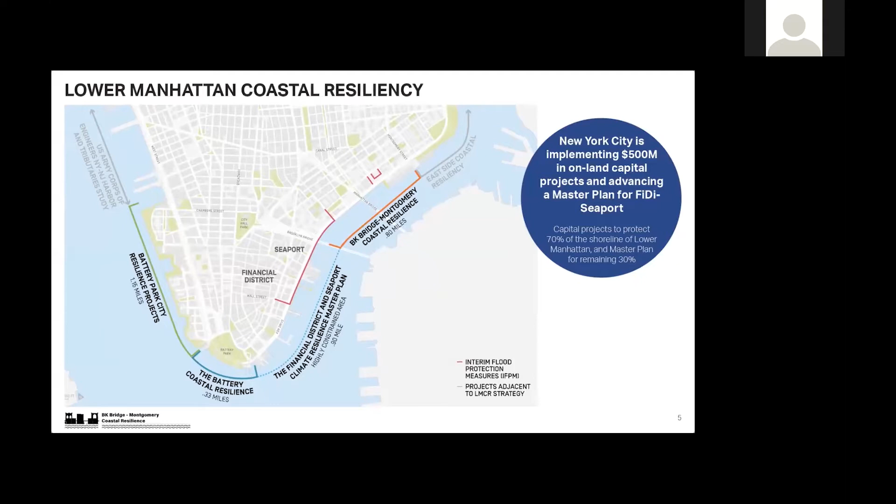And finally, the focus of this presentation, the Brooklyn Bridge-Montgomery Coastal Resilience Project, or BMCR for short. BMCR will reduce flood risk in the 2 Bridges neighborhood while maintaining the community's views and access to the waterfront.

In 2 Bridges, flooding from Hurricane Sandy damaged buildings and infrastructure, disrupted mobility and access, and demonstrated the neighborhood's vulnerability to climate change.

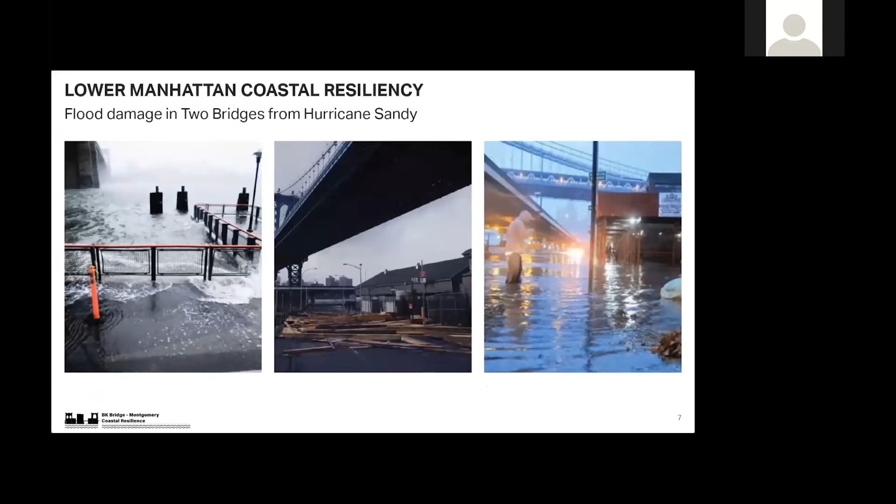In the future, impacts from coastal storms will be even more severe. This map shows the potential flooding that could result from a 100-year storm surge in the 2050s. A 100-year storm has a 1% chance of occurring every year. Flooding may extend up to 3 blocks inland, and most of the buildings within the floodplain are residential. People and homes will be at risk.

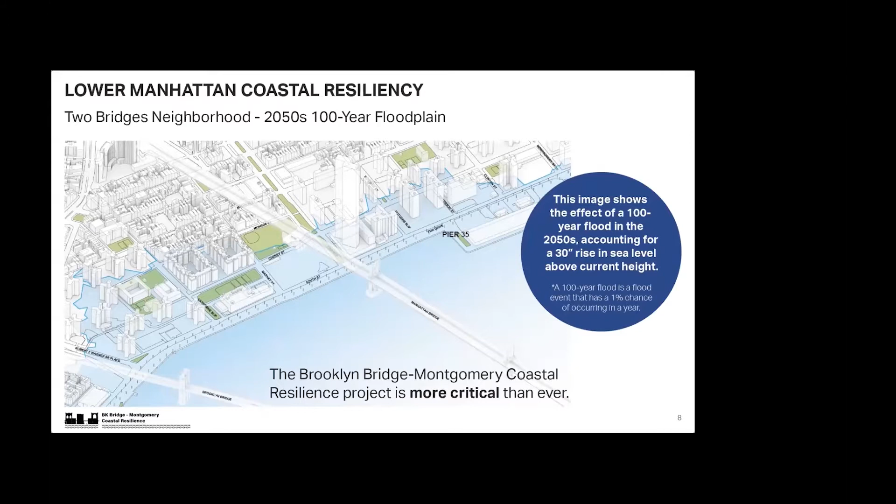For more than 4 years, the BMCR project team has been meeting with the community to get input and feedback on the design. In addition to top priorities of reducing flood risk and preserving views and access, we heard how this community uses the waterfront today and what types of amenities should be kept or added to the waterfront.

This presentation will show how community feedback was incorporated into the design. For example, we heard the desire for flexible use spaces, universal fitness equipment, playgrounds and gliders, and have worked to incorporate these features into the design.

We've come a long way since 2016, and the design is now more than 75% complete. That means the design components are set, including the flood protection system and public amenities.

Through the final design process, we'll be adding details for construction. Final design is scheduled to complete next summer, 2021, and construction will start at the end of 2021. We will hold one more public meeting in the spring to share next steps.

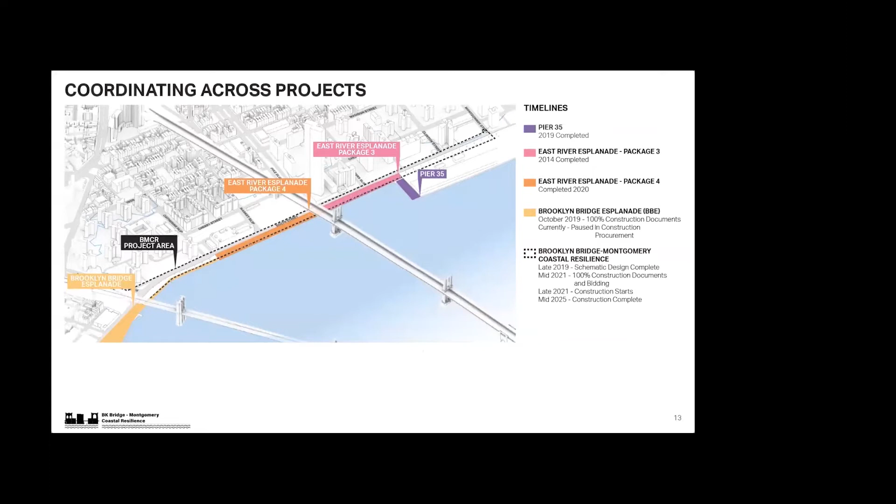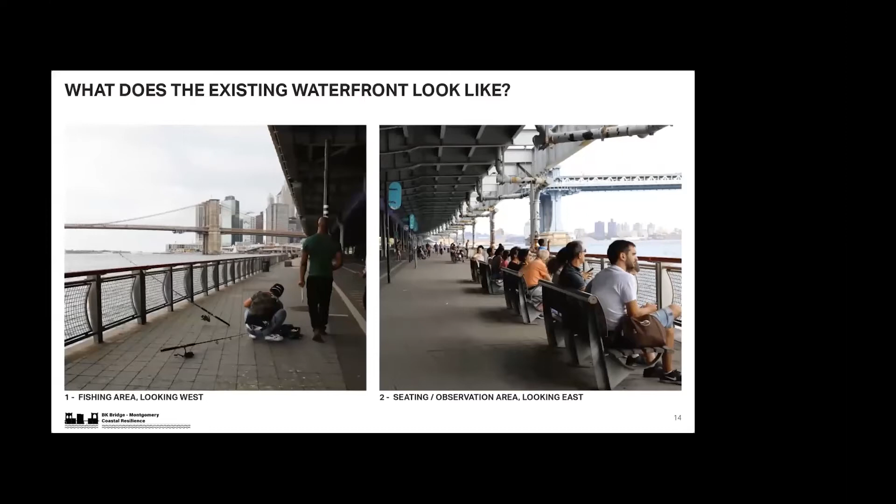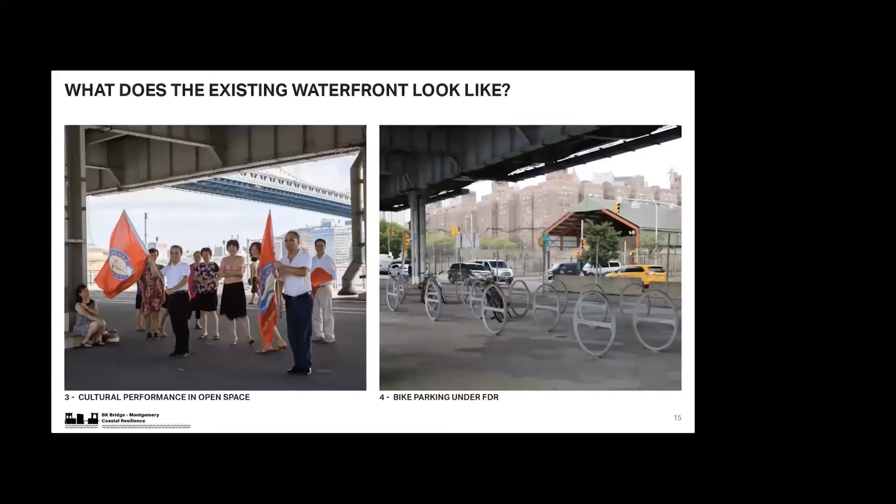The waterfront today is an active public space shared by the whole neighborhood. The Esplanade features fishing and seating along the waterfront, open flexible spaces and bike facilities, and recreation facilities like basketball courts and fitness equipment.

Two Bridges also has spectacular, iconic views of the East River and the Brooklyn and Manhattan bridges. However, the waterfront is already constrained by the overhead FDR, and we understand it's critical to preserve the existing views and access to the waterfront as much as possible.

In order to make sure the community can continue to enjoy the waterfront in the future, the design uses a combination of deployable floodgates as well as fixed flood walls. These gates provide resilience while preserving views and access to the waterfront.

When they're not in use for a storm event, flip-up gates are stored hidden in the ground. Roller and swing gates provide openings between fixed structures. These gates are visible above ground, stored upright against fixed flood walls. All of the gates will be closed and secured before a major storm event.

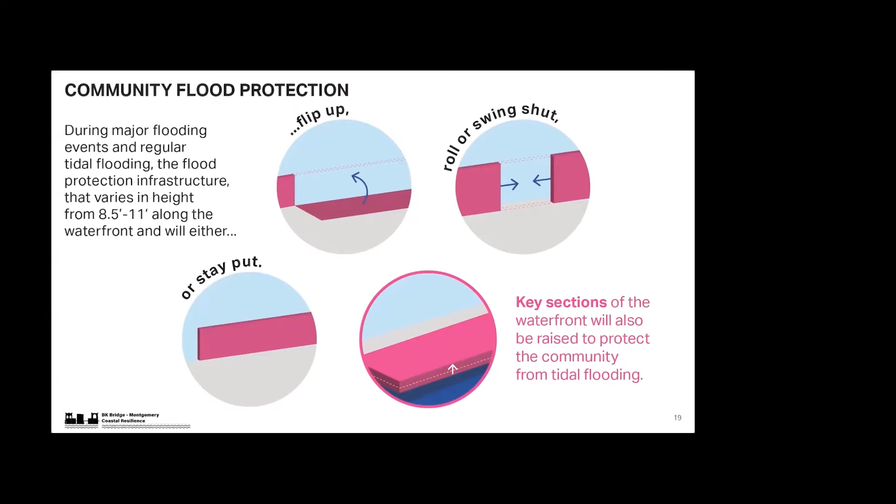Along the waterfront esplanade, the flood protection will primarily consist of flip-up gates, powered by hydraulic power units, or HPUs, which are housed in columns between the gates. Due to engineering and space constraints, flood walls, in combination with roller and swing gates, are used in a few locations along the esplanade, also in front of Pier 36, and where the flood protection ties inland at the Brooklyn Bridge and Montgomery Street.

The Two Bridges neighborhood will be at risk of frequent tidal flooding, even on sunny days, by the 2050s. Sea level rise, combined with high tides and small storms, will raise the water level above the edge of the shoreline. Tidal flooding will be less severe than major storm surges, but will likely occur more frequently.

We've heard from many community members that this is a big concern. People have seen the water coming up closer to the edge of the esplanade and have already experienced days when there's water on the esplanade. We have a real opportunity with this project to respond to multiple kinds of flood hazards, to raise low areas of the waterfront and address not only future coastal storms, but also sea level rise.

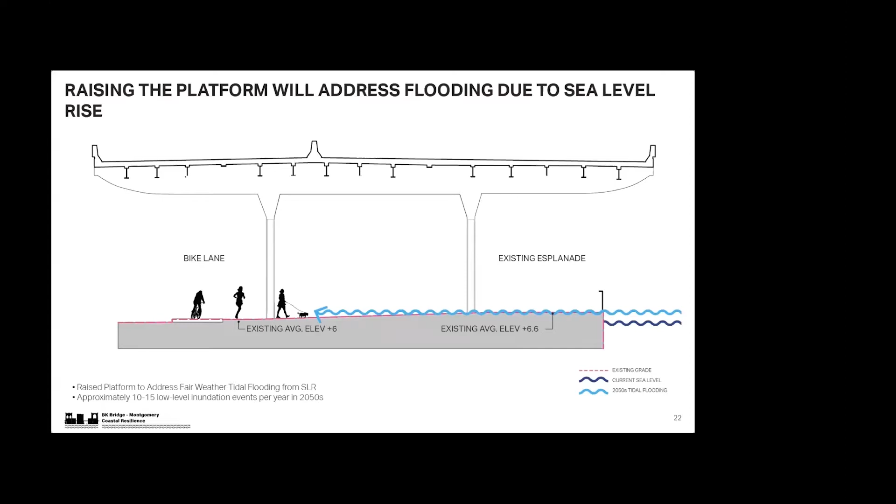To reduce the risk of tidal flooding, the flood infrastructure will be built on top of a raised platform, up to 2.5 feet high. The flood infrastructure on top of the platform will be deployed during major storm events to reduce flood risk from coastal storms.

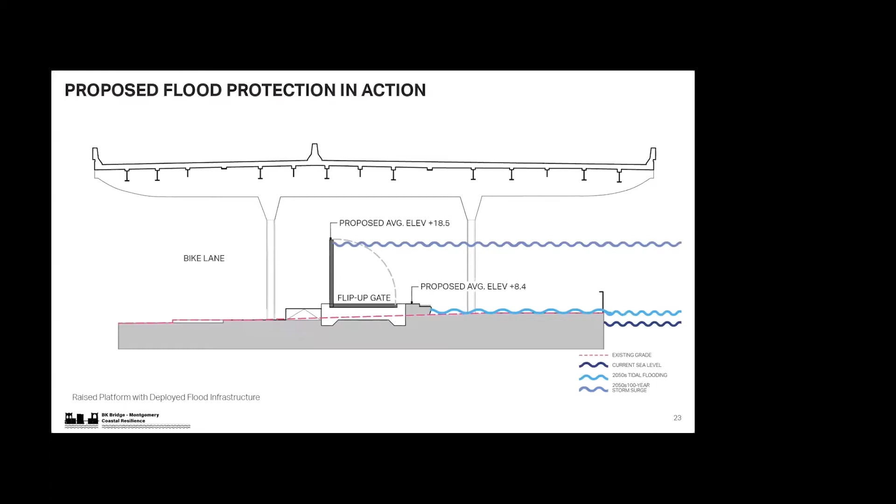The platform will be raised in the middle of the esplanade and will incorporate both steps and ramps for universal accessibility. Program amenities will be included on top of and around the platform.

The design of the flood infrastructure and public realm responds to a number of site constraints above and below ground, including required clearances around the FDR columns, foundations, and overhead structure, underground utilities and major sewer infrastructure, access along the waterfront for maintenance and emergency vehicles, and vehicular access on the upland side of the flood protection for floodgate deployment operations.

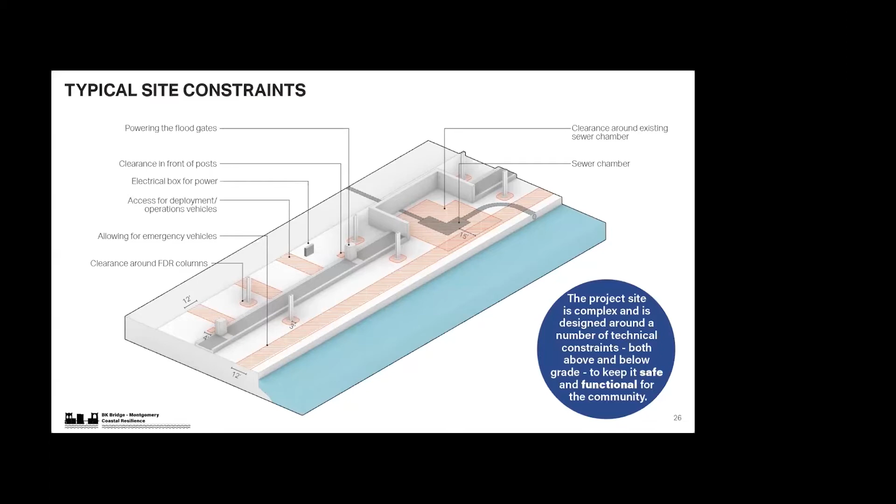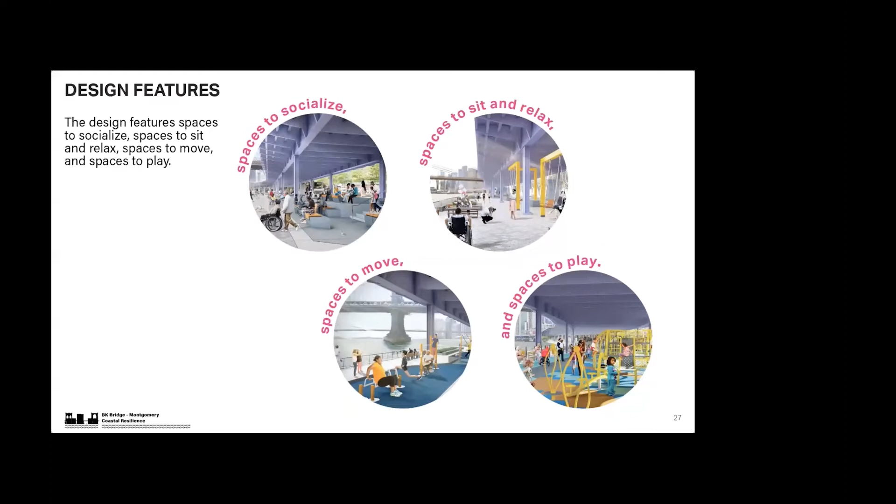The design features a variety of opportunities along the waterfront, including places to socialize, to sit and relax, to move, and to play. Social gathering spaces, shown in pink, are located at street intersections, where people arrive at the waterfront from the neighborhood. Spaces to move and play, shown in orange, are located across from residential buildings at the north and south ends of the site. In between, shown in blue, gliders and benches provide quiet spaces to sit and relax.

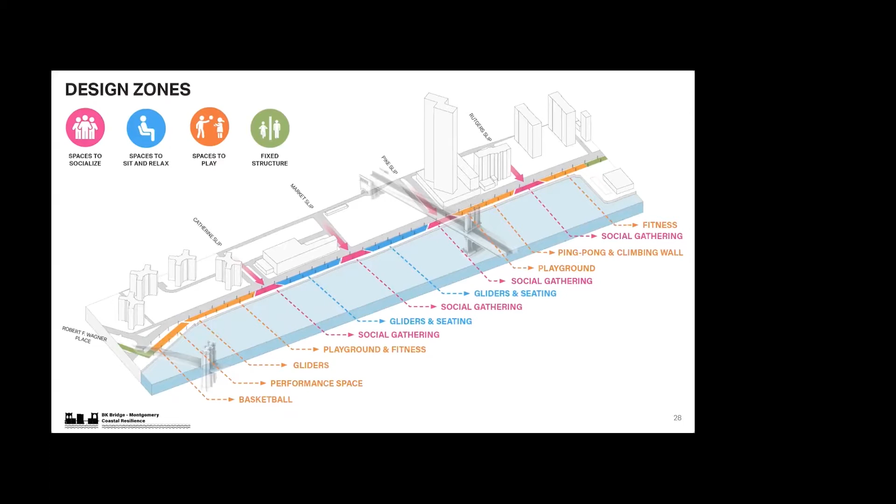Starting at the Brooklyn Bridge, let's take a closer look at each of these spaces. This area is located just north of the Brooklyn Bridge, across from Robert Wagner Place and the NYCHA Smith houses.

The dark gray striped band in the center of the esplanade is the flood infrastructure: metal-clad flip-up gates on top of the raised platform. In between the gates, concrete columns house the hydraulic power units that operate the gates. Ramps and steps provide access on both sides of the platform.

The green box in the lower left corner is a small storage unit that NYC Parks will use to store maintenance equipment. Public amenities include gathering areas with benches, chaise lounges, and game tables, a picnic area, a basketball court, a small community performance space, and glider swings.

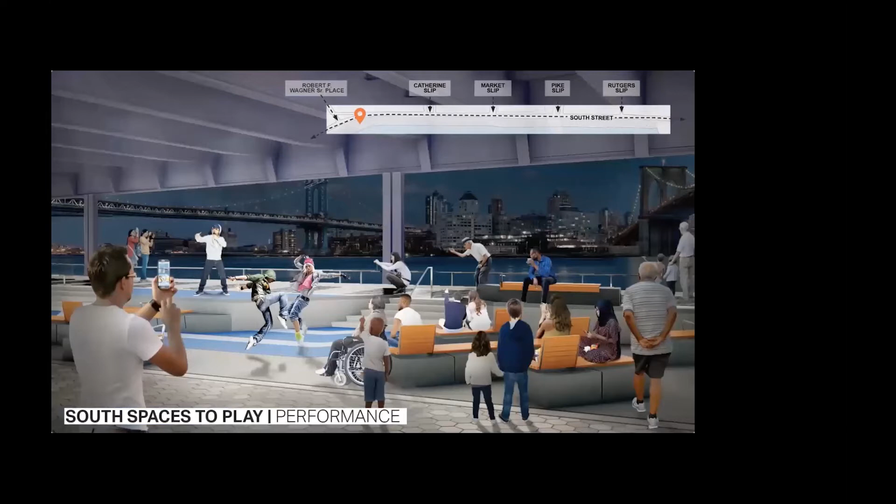This is a view standing on top of the flip-up gates looking north. The basketball court and picnic area are on the left. Here, looking out towards the East River, the Brooklyn skyline with the Manhattan and Brooklyn bridges provide an impressive backdrop for the community performance space.

Just south of Catherine Slip, across from the Smith houses, the flip-up gates are located underneath the bike lane because of engineering constraints on the esplanade. The raised platform widens to make space for a playground and fitness area.

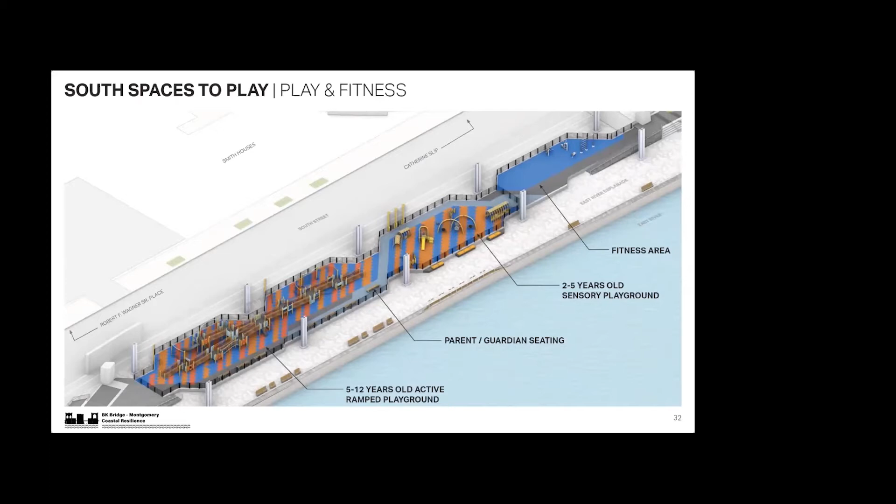The playground includes an accessible ramped play space for the 5 to 12 age range and a sensory playscape for 2 to 5-year-olds. The playground also includes plenty of benches for parents and guardians to relax while their kids run and play.

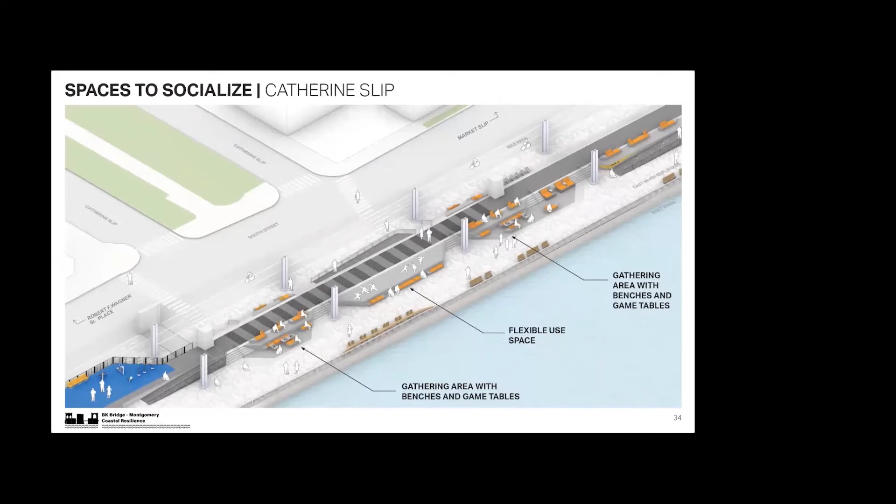At Catherine Slip, a ramp located between the crosswalks provides access to the flexible use space and seating on top of the platform. Clusters of benches, chaise lounges, and game tables offer space for people to hang out and socialize.

During a storm event, the flip-up gates stored inside the platform will be raised into their vertical position to keep the water out. The furnishings and other amenities are designed with durable, resilient materials. However, in the event of a major coastal storm, some damage is inevitable, and elements will need to be repaired or replaced.

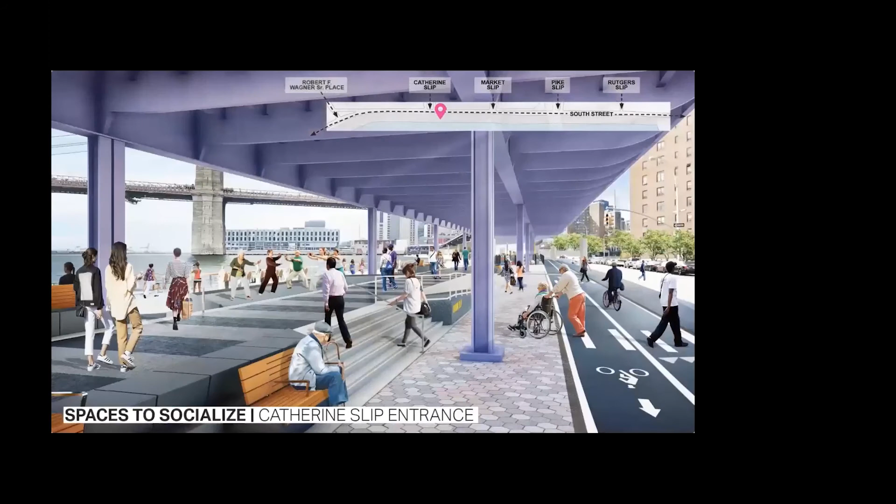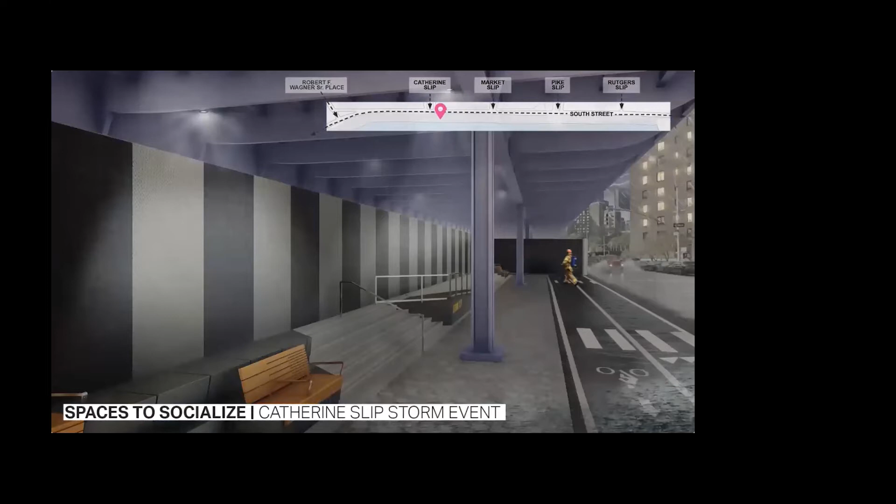The flip-up gates are clad with metal tread plates, coated in a non-slip material to create a safe, elevated promenade. The two-toned banding pattern on the gates highlights activity areas along the waterfront and can be seen on the inland side of the flood protection system when the gates are closed during a storm.

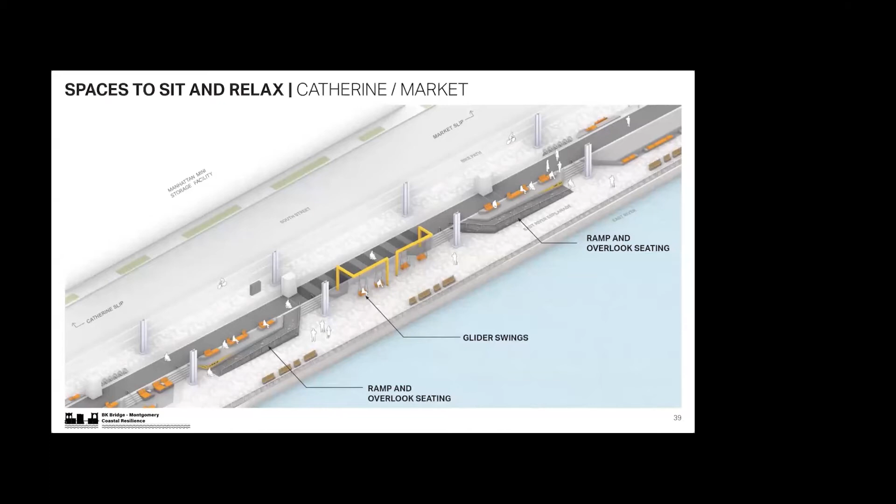Between Catherine and Market Slip, gliders and overlook seating provide quiet spaces to relax and gaze out over the East River. Near intersections, street names are engraved in the sides of the platform for wayfinding.

At Market Slip, flip-up gates cannot be installed on top of a large sewer chamber underground, so a rolling gate is used instead, shown here in the open position, stored against a fixed flood wall. The ground level slopes up towards the opening in the wall to prevent tidal flooding.

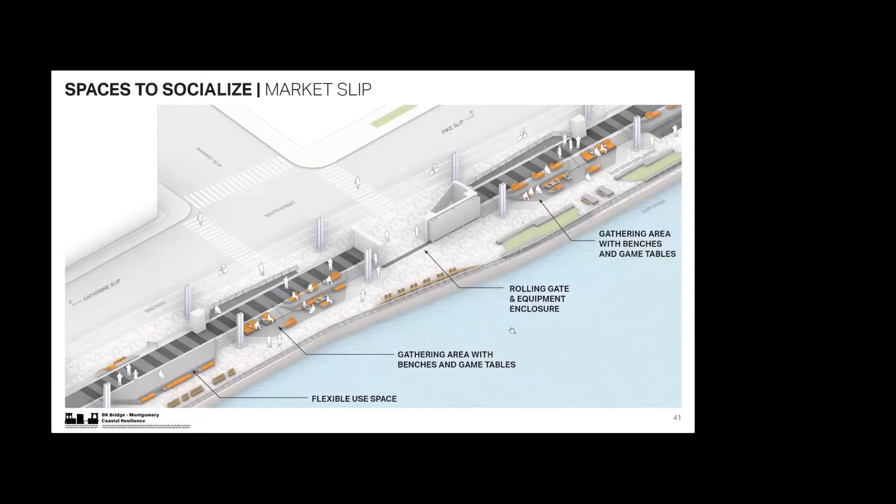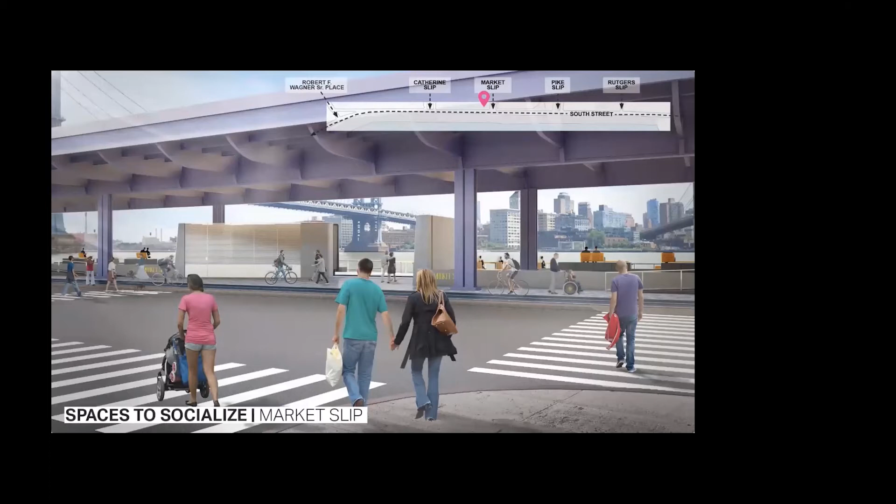Looking towards the waterfront from South Street, a louvered metal screen encloses equipment stored against the flood wall and frames a dramatic waterfront entrance.

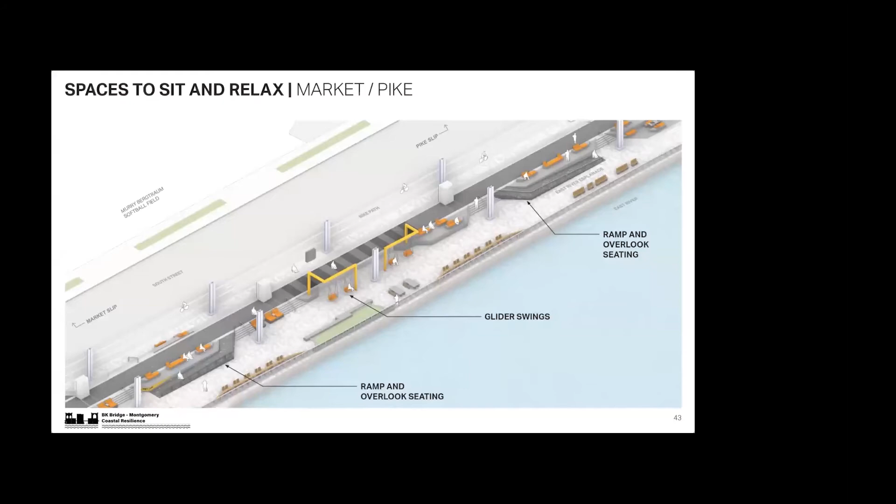Between Market and Pike Slip, gliders and benches offer more spaces to sit, relax, and enjoy the stunning views of the Two Bridges waterfront.

At Pike Slip, the design is similar to Catherine Slip, with a flexible use space centered between social gathering areas. The ramp and stairs are located near the crosswalks for easy access from the neighborhood.

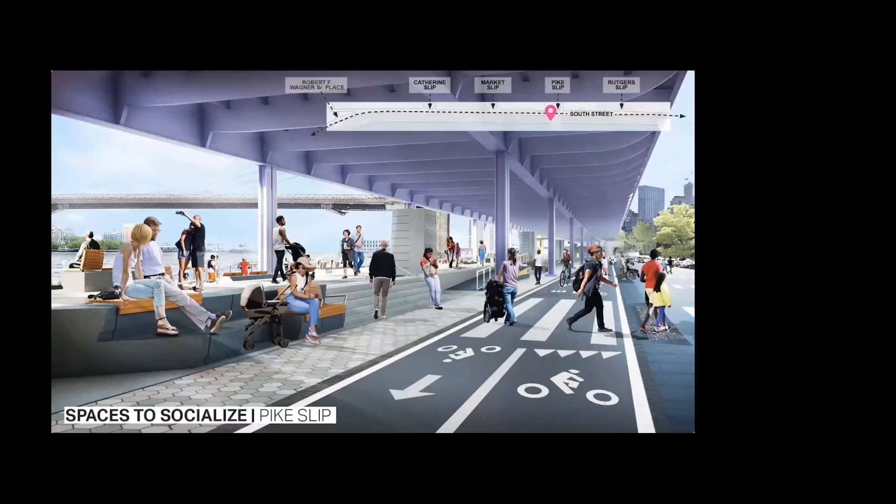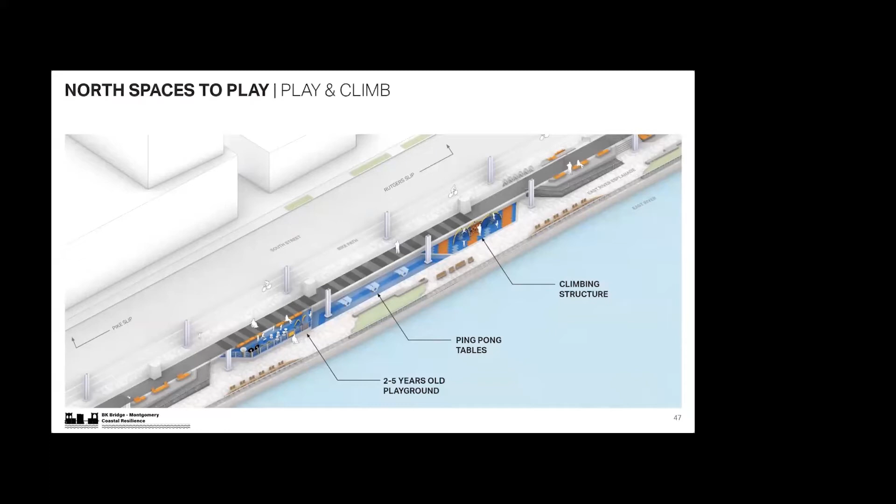Between Pike and Rutgers Slip, a playground, ping pong tables, and a climbing structure create an activity zone for kids and teenagers. The playground includes visual and tactile pieces that create a sensory play environment for 2 to 5-year-olds, while the climbing structure challenges older kids and teens.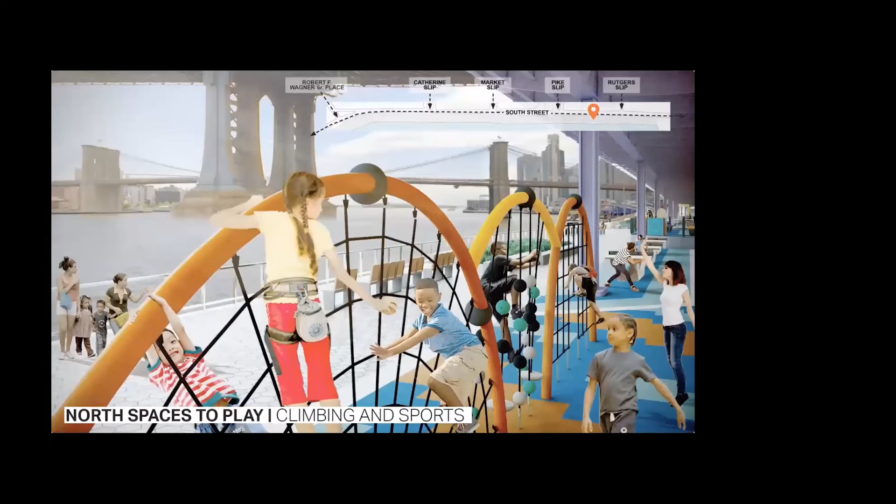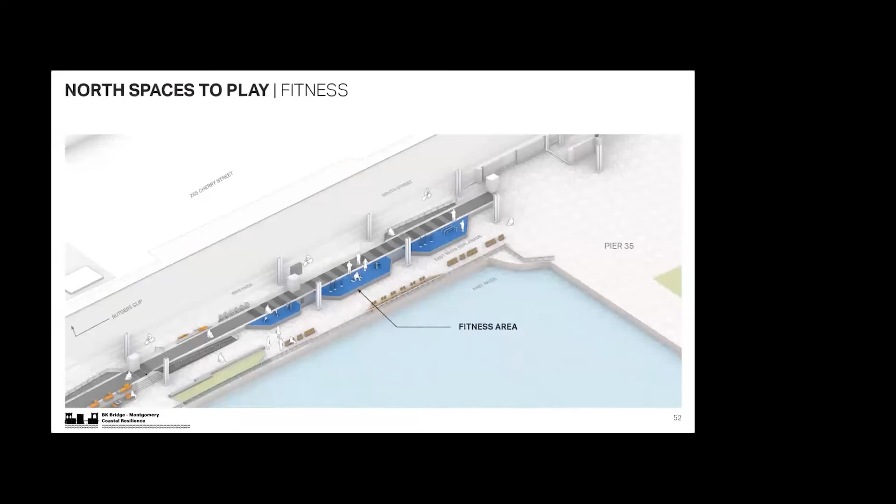Just south of Pier 35, the raised platform widens to create space for a fitness area with a variety of equipment, including universally accessible pieces that everyone can enjoy.

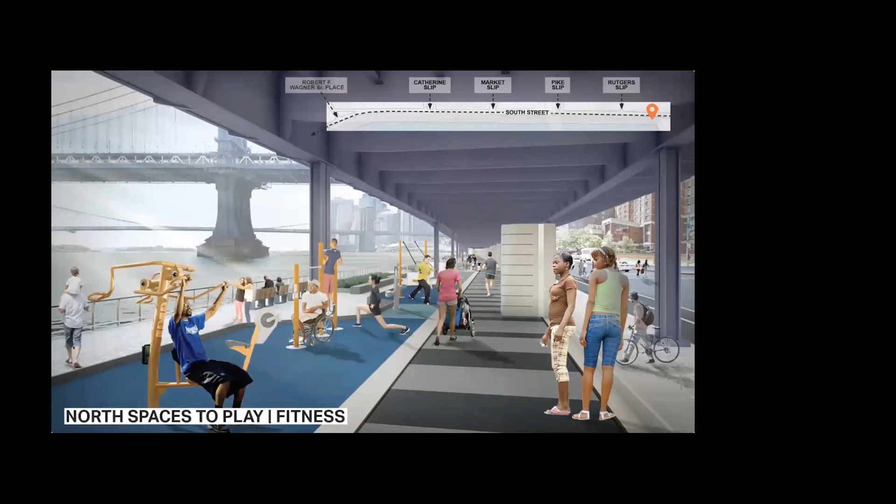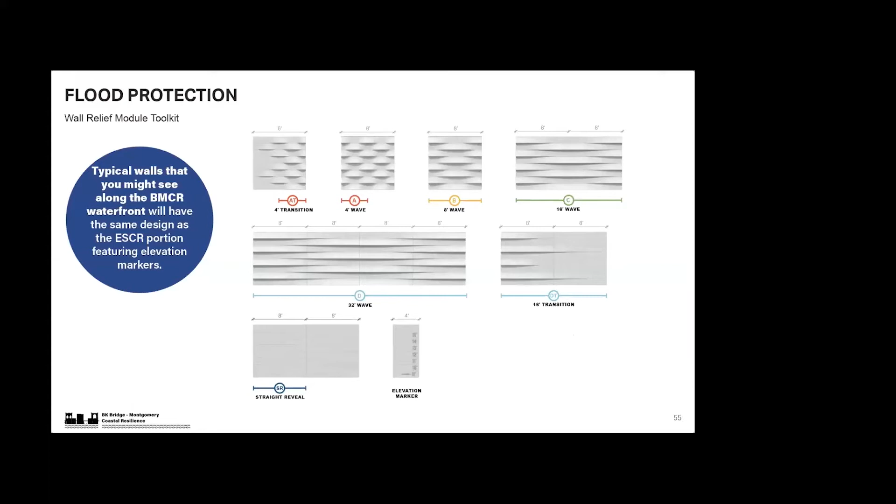Next, let's take a closer look at the design of the flood infrastructure elements. The flood wall design will feature the same wavy patterns and elevation markers as the adjacent East Side Coastal Resiliency Project, or ESCR. The wave patterns change from short to long waves as you move along the flood wall.

The roller and swing gates will be clad in a light gray metal and will feature the same etched banding and identification numbering system as the ESCR gates.

The flood protection system ties into high ground at the Brooklyn Bridge, and the flood wall extends along the south side of the bridge towards South Street.

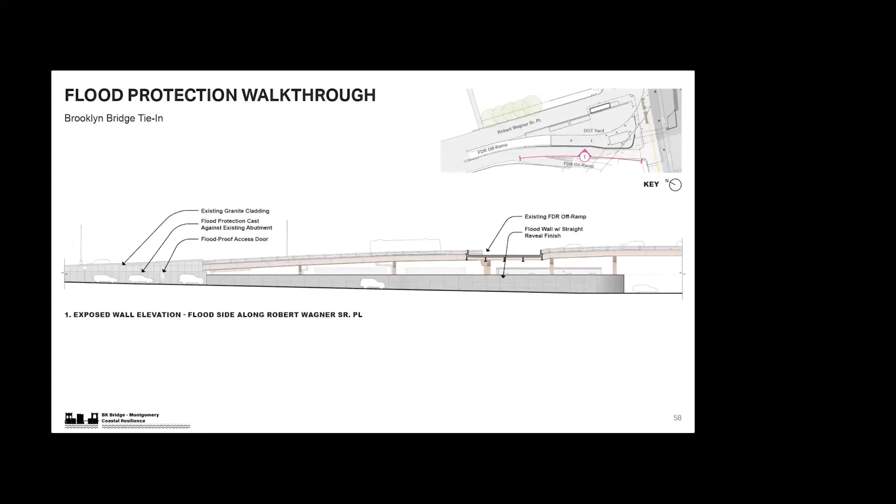A flip-up gate is used to cross South Street, maintaining pedestrian access along the sidewalk and vehicular access along South Street, except when the gate is deployed during storm events.

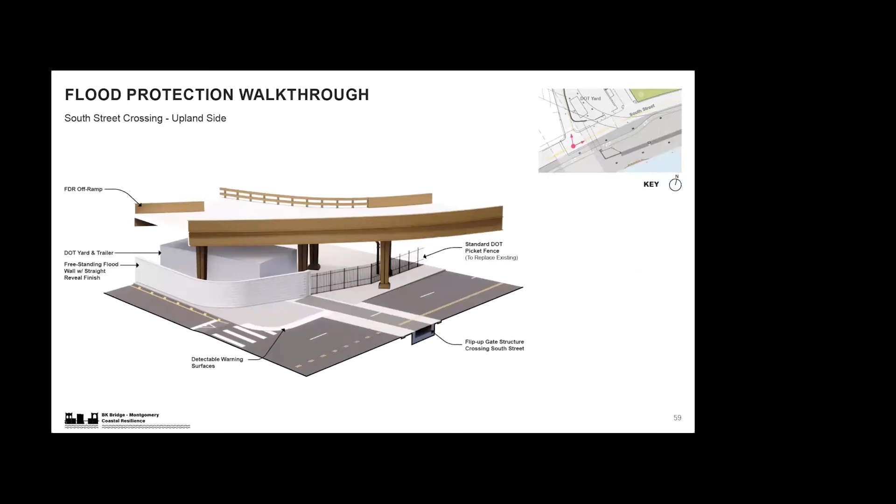The hydraulic power units that power the flip-up gates will also feature elevation markers and identification numbers on the concrete columns that house them.

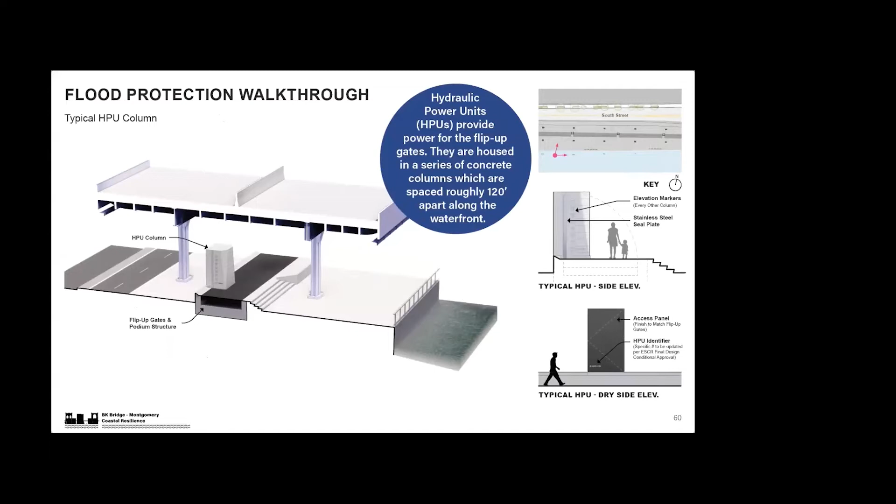At Pier 35, flip-up gates cannot be installed on top of an underground sewer chamber. Instead, the design uses two swing gates stored against the flood wall to connect across the underground sewer.

In front of Pier 36, where views and access to the waterfront are already blocked by the Pier 36 facilities, the design primarily consists of a flood wall, with roller gates used to provide driveway access for NYPD, sanitation, and other authorized vehicles.

The flood wall curves in at the driveways to ensure clear sight lines for pedestrian safety. The design will also increase the width of the sidewalk to improve pedestrian conditions.

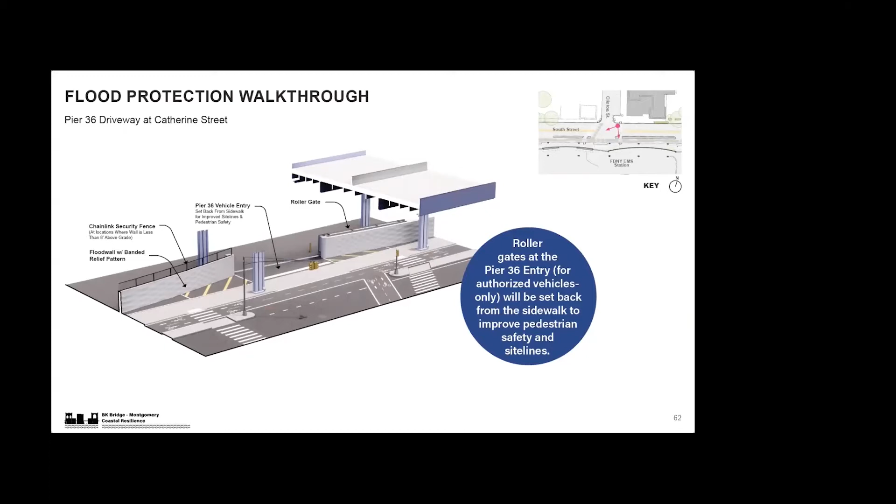Near Montgomery Street, a flip-up gate is again used to cross South Street, maintaining pedestrian sidewalk access and vehicular access, except when the gate is deployed during storm events.

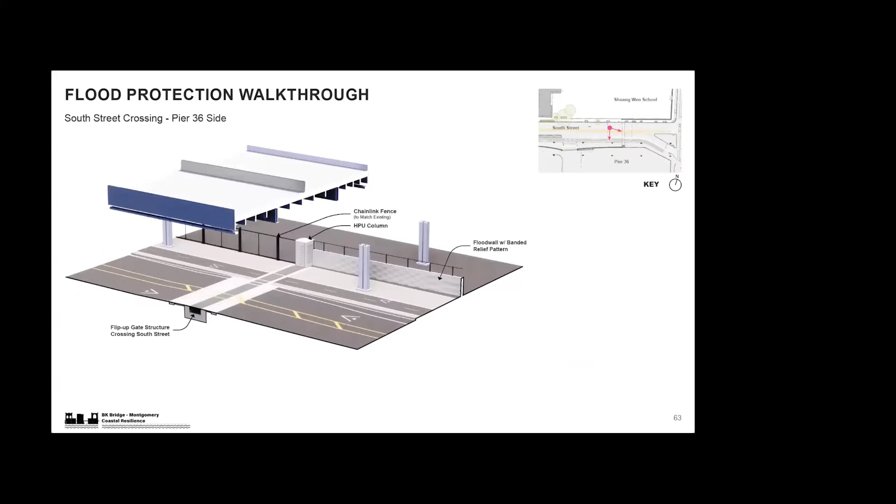Finally, at Montgomery Street, the flood wall will be installed against an existing retaining wall around the PS 184 recreation yard. A small flip-up gate will be used to maintain access to the recreation yard.

This project incorporates coastal flood protection with a significant investment in the drainage system. The Interceptor pipe carries large flows of water to the Manhattan pump station, which then pumps water to the Newtown Creek treatment plant in Brooklyn.

In order to reach the Manhattan pump station, the Interceptor pipes in the BMCR project area connect to the Interceptor pipes in the ESCR project area. During a coastal storm event, the Interceptor pipe needs to be closed off at the north and south ends of the flood protection system so that floodwater doesn't enter the sewer and cause flooding from underground. Interceptor gates are being installed inside the pipe to prevent this from happening.

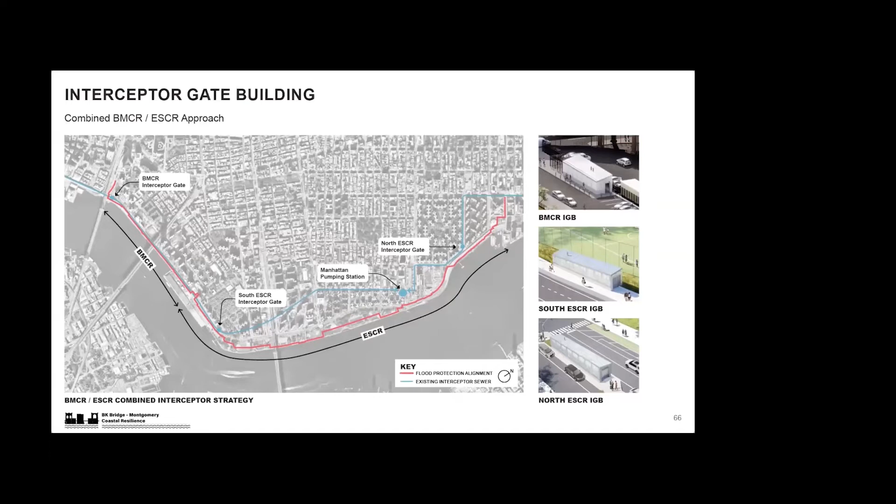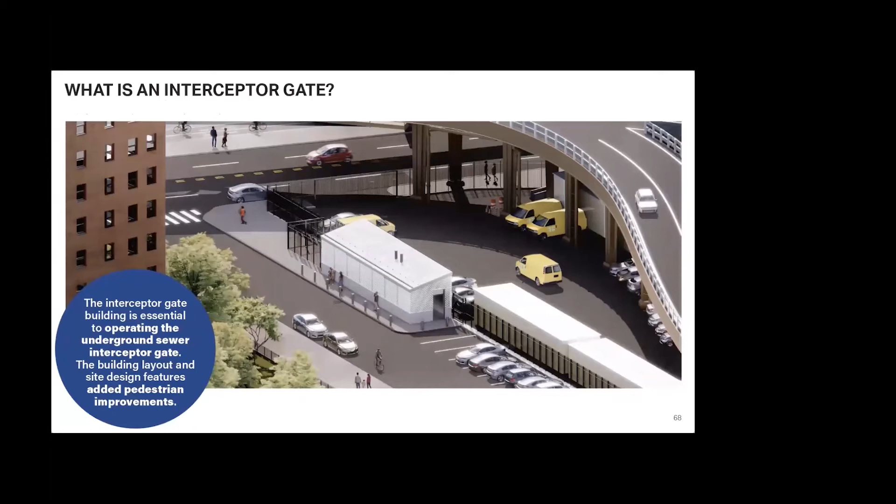An Interceptor gate building will be located on Robert Wagner Place, adjacent to the existing DOT yard. The building houses equipment needed to operate the underground Interceptor gate. The design will include a small fenced-in area that will enclose a temporary generator brought to the site during storm events.

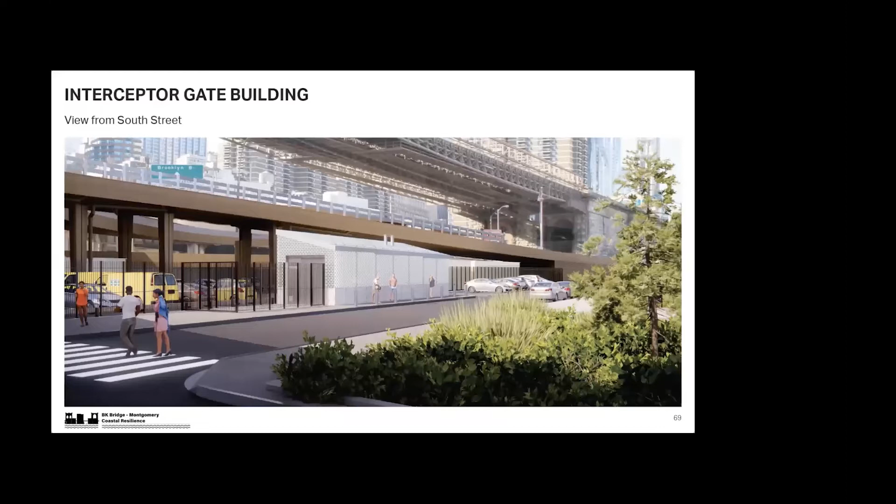The design will also improve the existing pedestrian conditions along South Street by extending the sidewalk and adding a crosswalk connection across Wagner Place. As part of the site design, Wagner Place will also be converted from a two-way to a one-way street.

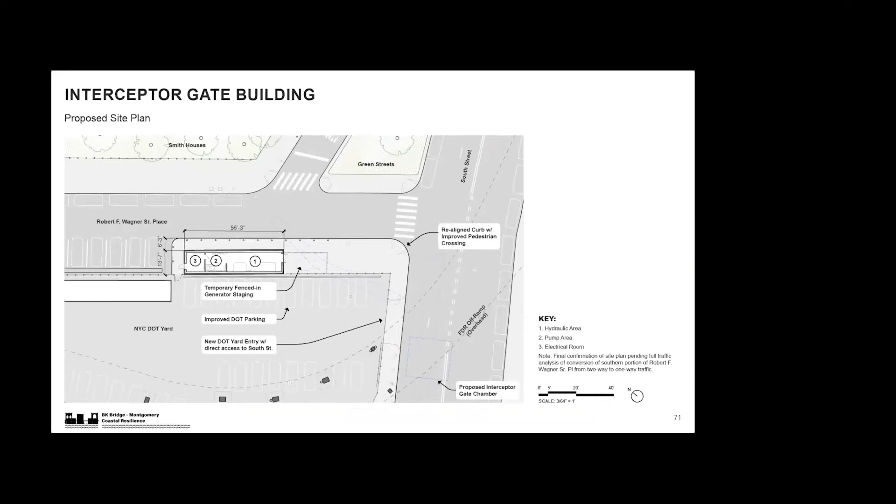That brings us to the end of this presentation. Thank you so much for your time, and please stay in touch for future updates about this important resilience project.

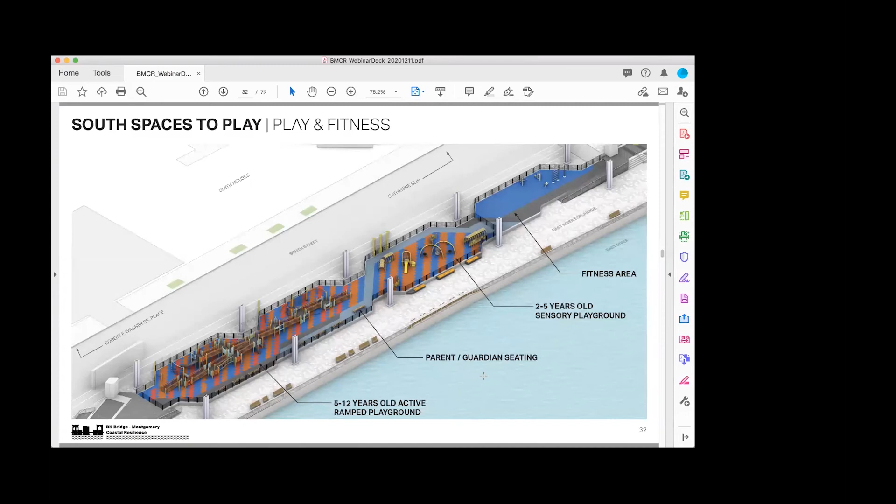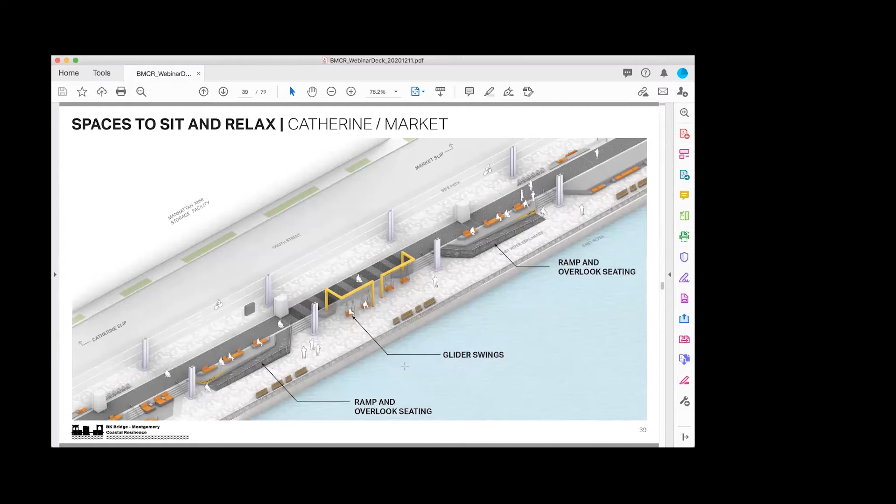I think the gliders are a really nice addition too. I can't really distinguish what the gliders look like, to be honest with you. Is there another zoomed in version? These are generally the same sorts of large bench-size swings that are down on Pier 35 right now.

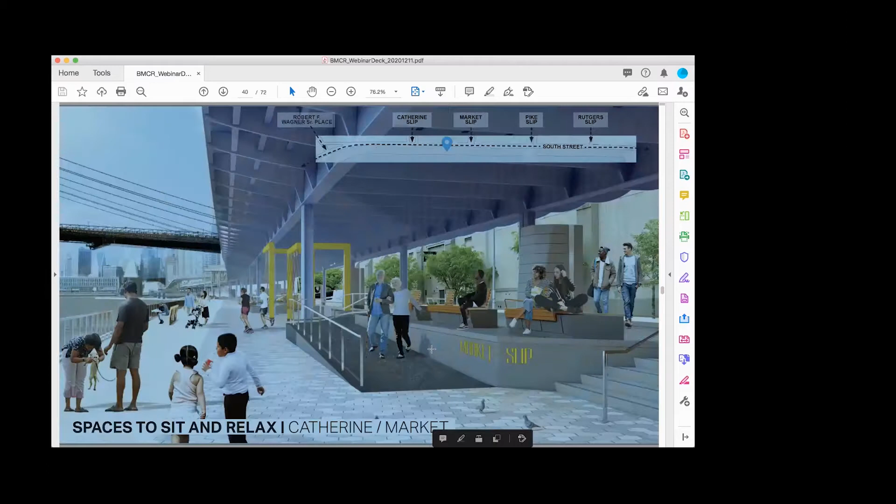And that leads me to my final question, in terms of access for people with wheelchairs and walkers, because I have a lot of grandparents who are either in wheelchairs or walkers who watch their grandchildren. And by the way, on South Street, Wagner, what needs to happen is a light, and that street is already one way, it's always been one way. The only reason it's two way is a little piece, so the city workers can pull out instead of having to go around Smith, they can go onto South Street. It's not even a whole block.

That's right, just that very narrow two-way section. And what needs to happen is there's a stop sign on South Street on the Smith side, and it's like a fork. So what really needs to happen is a light that directs the traffic, because it's crazy if you're going to make those changes and bring in a generator every time there's a flood.

So really quick before we go to that question, on the accessibility piece, I think it's a very good question. That's something we're always working to balance, because to prevent the flooding we need to have raised elevated surfaces. So up and down the raised platform, which will prevent against sea rise, there are ADA accessible ramps every so often, I think every block or so, which will allow folks with a mobility impairment to cross quite easily.

Yeah, because you can't really tell, and that's why I'm asking. So I'd also like to add, on the city lot on the corner, that little one-way section or two-way to one-way section, we're actually moving the gate for the city lot to South Street from Wagner Place.

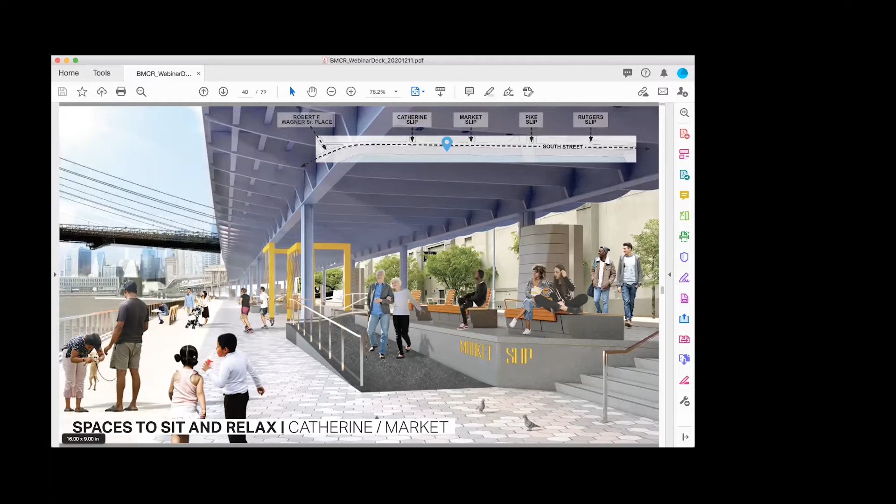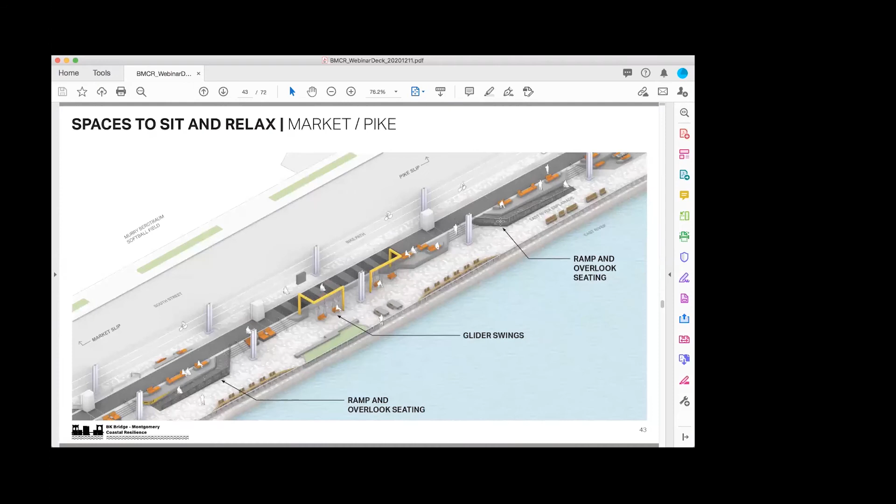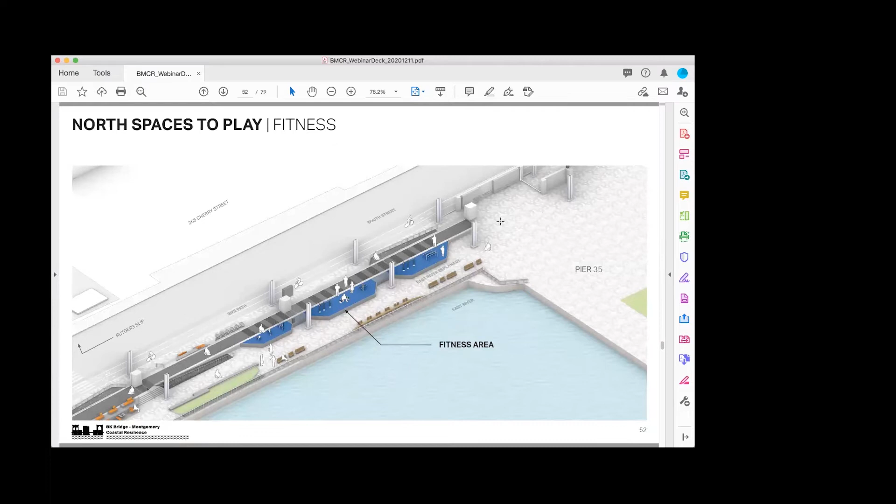So, if we can go to near the end, there's a graphic of the Interceptor building. We're moving that gate around the corner, right on South Street, since it's not even on Wagner Place, it's diagonally situated. I have to cross it all the time, and I can't tell you how dangerous it is. Right, so we are adding a new crosswalk there, and that should improve that condition.

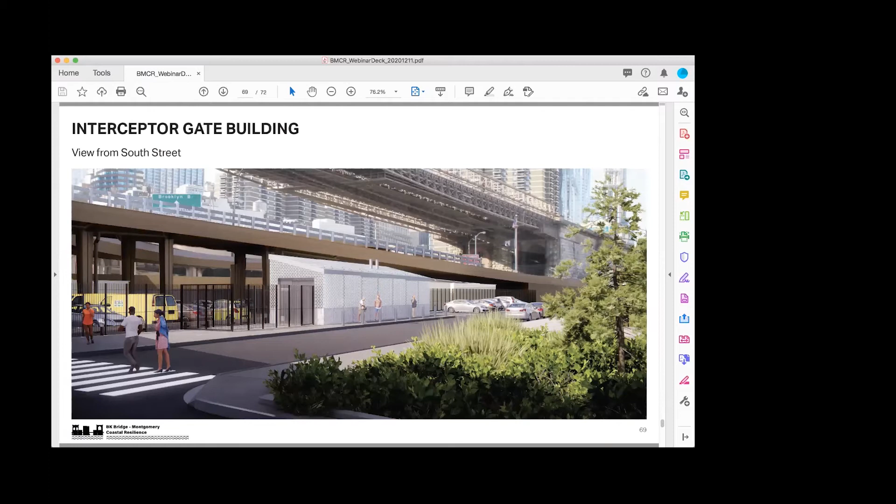The last thing I'll mention regarding all of this is, obviously you have here... there it goes, should be here. Perfect. So I think generally, in addition to renderings like this, this presentation is going to be posted online.

Okay, we also have a record of who signed into the meeting and who we have contact information for. We're going to be posting that on the website.

We have 3 or 4 sort of 360 virtual reality tours of the project, so you'll scroll around as if you're standing in a location along the project and see what it will look like when it's completed. We're really excited about that. I think it's just getting finished today, so we're going to have it posted on the website shortly, and hopefully that'll make it easier to grasp what's going on, because this is a big project, of course.

Oh, and my only other question is, when the rodents erupt, do you have a plan for rodents?

Right, of course. So as you might know, EDC is designing the project, and DDC, Department of Design and Construction, will be constructing it. They're here this evening, but generally we'll be working with them on the construction handoff. Once we get into the construction phase, which will begin in late 2021, I'm sure they'll be complying with all the requirements for that. I don't know if they're on the phone and want to add anything, but with a project of this size, that's something very important to pay attention to.

Listen, with the construction we've had in Smith because of Sandy resiliency, we have counted 167 rodent burrows in Smith. That's why I'm asking the question, because where are they going to go? Everything else is concrete, and we're the ones that have all the grass and everything. So there needs to be a real serious conversation when this starts with us, because it's not fair to the residents.

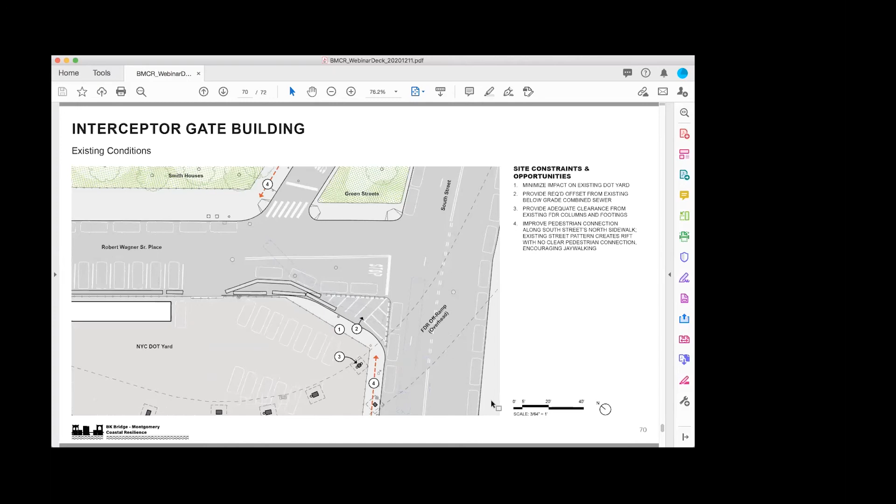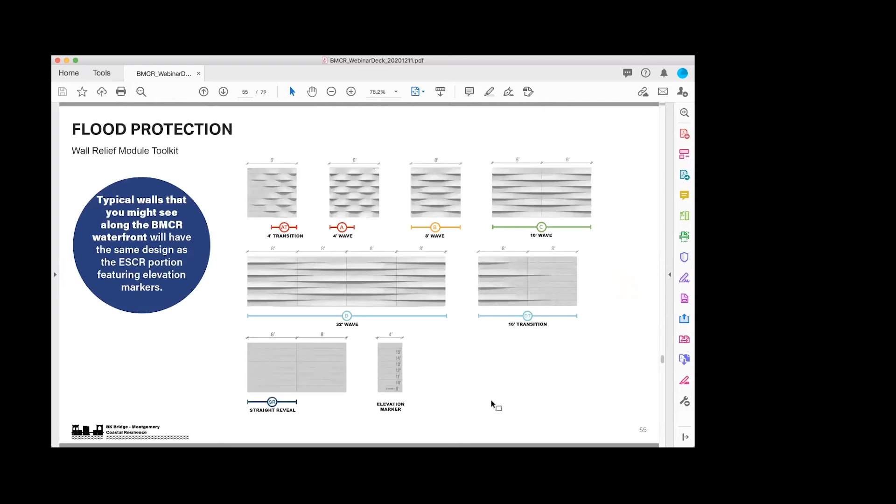Sure, and we also have our agency partners from DEP here as well, who will be responsible for operating and maintaining the system, and I think they can add some more detail. But we do have multiple methods to deploy the gates in the event of a storm, and we are developing, as part of this project, an operations and maintenance manual and a plan for emergency response scenarios. As part of that manual and plan, we'll be developing a regular maintenance routine for these gates to be tested, deployed, and inspected before each hurricane season.

Great. And then before we go back to folks asking questions live, I see another question, one that we neglected to answer for Ms. Torres, which was: could we elaborate a little on why the generator needs to be brought to the Interceptor building as opposed to being permanently there, or how does the generator come into play?

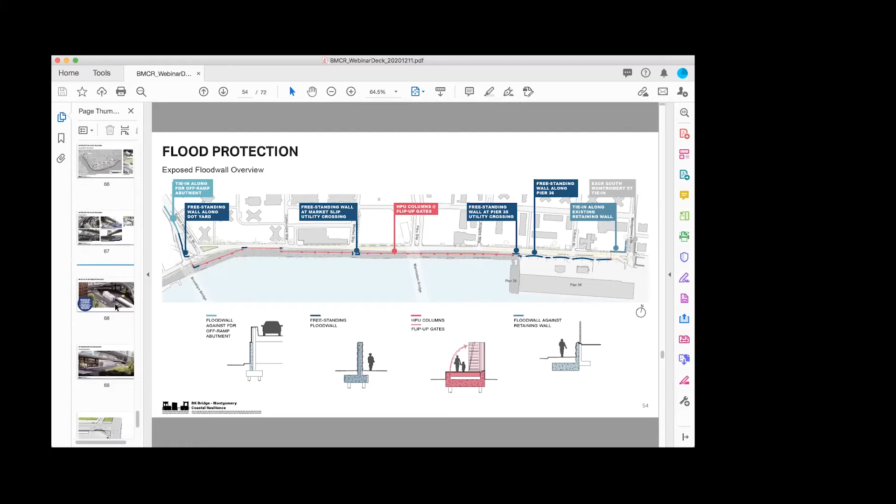And I'm not sure if that's for Lauren or for our partners at DEP. I can jump in here.

Sure. So there is a backup generator that needs to be brought to the site. In the event of power loss during a storm scenario, we want to make sure we have the power there to be able to close and operate that critical interceptor gate underneath the ground. Because of the siting and location of this building, we don't want to expand the footprint or make it too large so it wouldn't fit within the site. So the generator will be brought to the site during a storm event, and the fencing around it will be permanently installed so those items don't need to be stored inside the building, and the building interior can be room for all of the essential equipment only.

Great, thank you Lauren. So I see Trevor with his hand raised. Trevor, I'm going to ask you to unmute now.

Thank you, Will, and the BMCR team for this presentation and for assembling this. I know it's been many years in the making, and we're nearing year 5, so hopefully we can get construction started. I'm going to stack my questions because I see other people have raised their hands, and I know there's some unanswered questions in the chat.

So my first question, and this may be something to note for later presentations, is the construction going to be staggered, or will the entire pier or entire Esplanade be shut down? By default, package 3 and package 4 and Pier 35 were staggered because of delays. But in the summertime, and as we enter a new COVID reality, we're going to need to make sure we have open space or some type of mitigation for the folks that use that space frequently. And access to Pier 35 will remain at all times, since that's a beautiful pier people use.

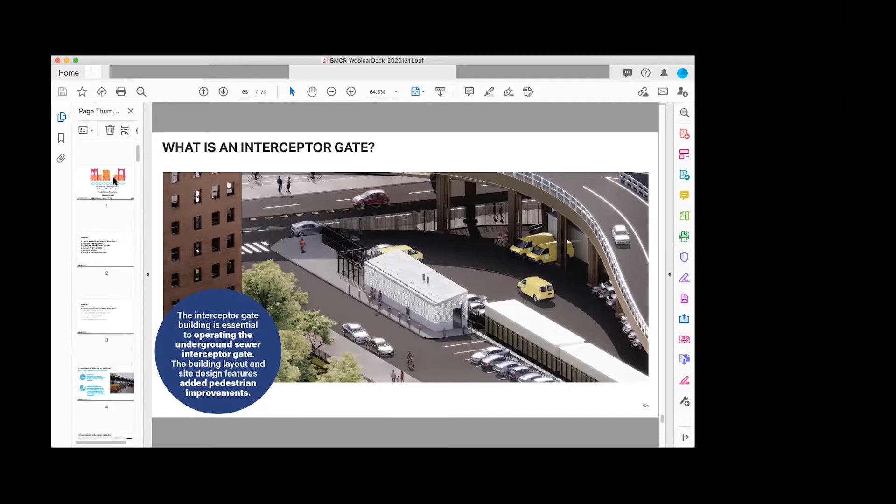On the FDR question - I'll let DOT chime in as well - the main distinction when you ask how this project works if the FDR comes down is that in the neighboring areas of the Financial District and Seaport, that's a longer term master planning exercise we don't currently have a funded project for. We're looking at alternatives and working closely with DOT on how to make something work from a transportation and resiliency perspective. But in this neighborhood, we have an implementable capital project that works around the FDR, so we're going to move ahead and build it as such. If there's a decision later to fund a project that involves that, we'll figure out the implications then.

There was another question from Trevor about Pier 36. Pier 36 hosts several facilities, including Sanitation, Fire Department, as well as a DOT yard. As Lauren mentioned earlier, we're still working out the operations plan for this project - what will actually happen when the gates get closed - and we'll have more details early next year at the next meeting. But generally, the Office of Emergency Management will be the entity that determines when a storm requires closing the gates.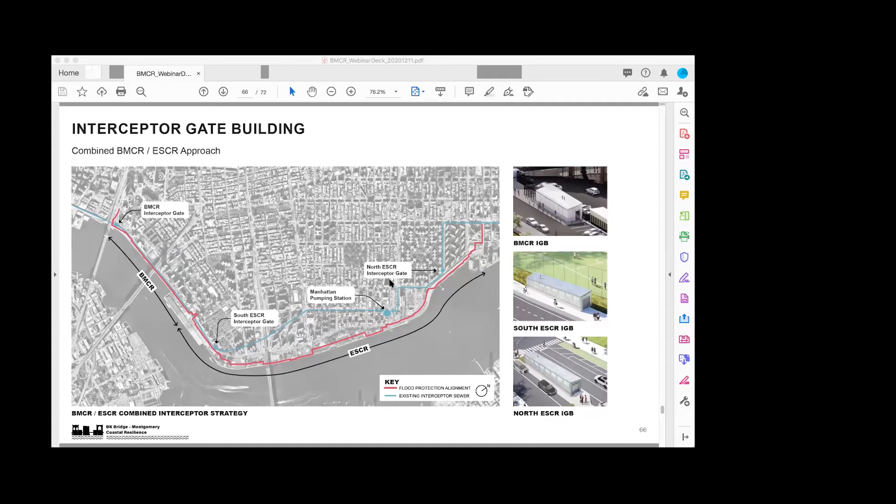However, I think you made a comment about a rendering looking like South Street was still flooded. Tanya, I think it's your screen we're sharing - if you could flip back to slide 38. Daniel, let me know if this is the rendering you were talking about. We do show the gates are in their vertical position, deployed, and we're on the inland or dry side of the flood protection system. In this illustration, there is still some water on South Street.

We're just trying to be realistic that during a major coastal storm, there's not just water coming in from the river, but there's also rain happening. So what we're showing there is just rainwater hitting South Street. That's not a depiction of the coastal flooding coming inland.

Great, thank you, Lauren. And Paul, are you there for the follow-up? Sure, yeah. I can't speak to the document that you read or what the DEP representative might have said in a document or in a meeting. We did a pretty extensive hydraulic model that we coordinated not only with DEP, but with the ESCR project to the north, to make sure that the projects would work in tandem and would handle both the storm and the sanitary without flooding the neighborhood. Because as you said, if the neighborhood is flooded from stormwater but protected from storm surge, we've only done half the job. So it will work for both, and the models show that it will work for both.

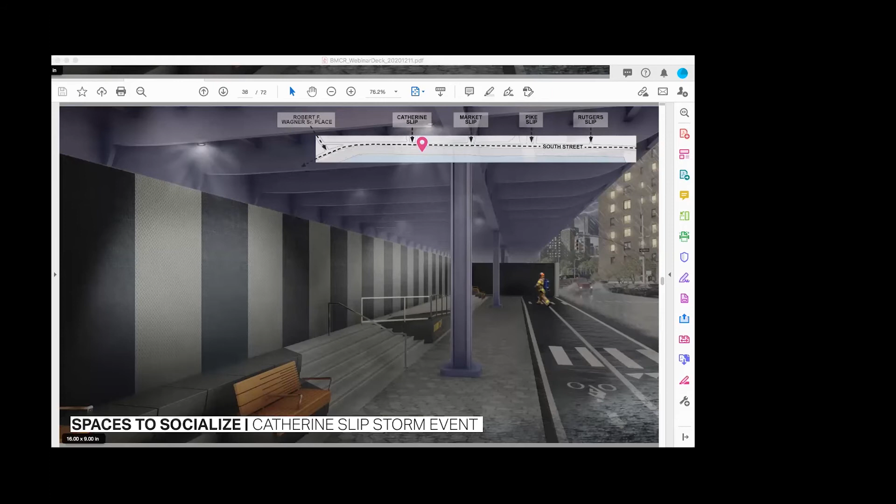I noticed there's a really large stretch of passive space between, I think, Catherine and Pike. I'm not sure how set you are with the design, but would it be possible to put some sort of activity in there? There's a lot of kids in Knickerbocker, or something for seniors. I think that would be nice for the residents who live here.

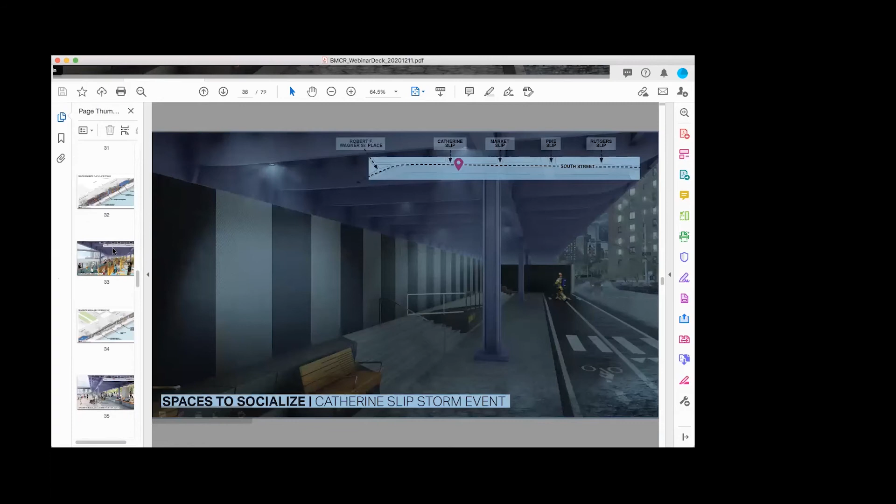And the other thing I want to mention is the lighting along this whole stretch, because as it is now, it's pretty dark in some places. So I just want to make sure that in the construction phase there is adequate lighting throughout the whole project. That's it, thank you.

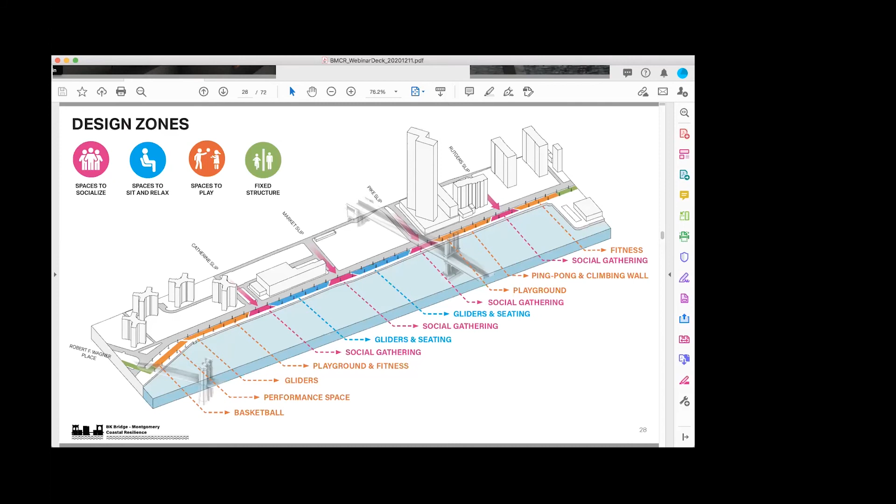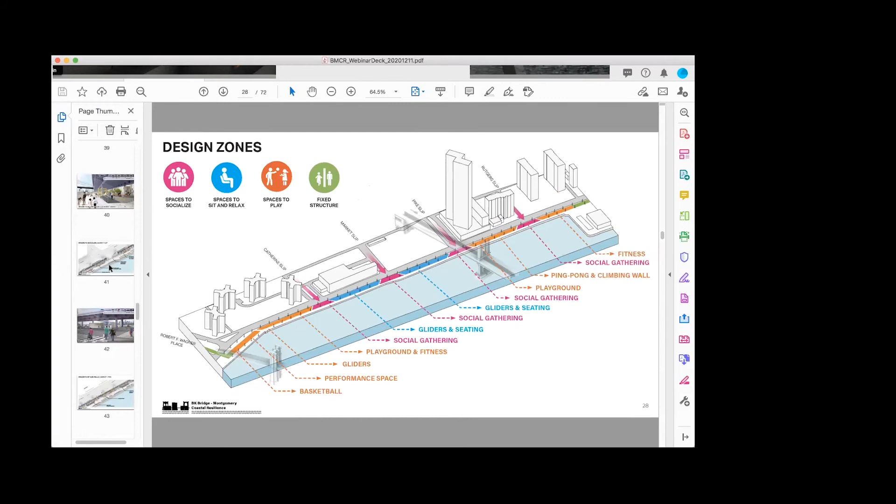The other thing is, your diagrams are very interesting, especially when you bring it down to the level of what it might look like. But in the northern part, around the Shuang Wen School and Basketball City, you don't have diagrams like that, and I think that would really help, especially when talking about design, because it's not exactly clear. You mentioned there's going to be a pretty big wall there, more of a structure than in other parts because it's already blocked, but I don't know if you want to show people more.

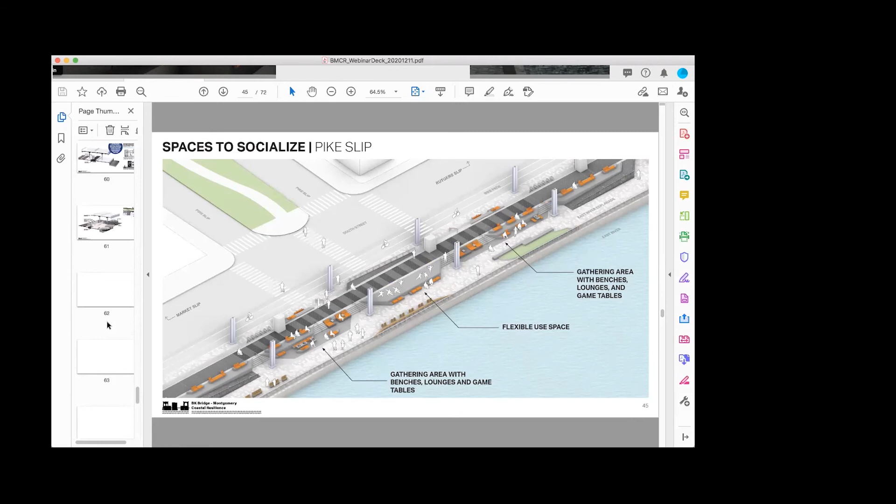The last thing is about communication. This project, we don't know exactly how long it's going to take and which pieces will finish first, but you also have the ESCR project going on, which could take even longer.

I really do think this issue about bike lanes and joggers needs to be integrated in some way, both in communicating with the public and in the design, because you could have a bunch of problems with traffic flow, especially if these things aren't done at the same time and there isn't coordination. The structure that goes into Corlears Hook Park, the southernmost part with the gate, is the end of that section, and then you have this project. What's going on between those two projects needs to be clarified more, because if the park closes, you have to move the bike lanes off the park somewhere else, and nobody's really clarified that. I know they're working on it, but we need a lot more public information, and it has to be timely.

So, of course, otherwise, yeah. No, of course. Well, thank you for your questions, Rocky.

I know it can be frustrating with the lack of information about construction. DDC, who will be constructing the project, is already attending design meetings, so it's important we have them in the room now so we're designing something that can be implemented. Once we get closer to construction, which is supposed to begin late next year, there will be more information, and up to a certain handoff point we'll coordinate with you as well as DDC to do adequate public notifications regarding closures, getting all necessary permits, and complying with public notice requirements. I appreciate you bearing with us while we finish design and get to construction, because once there's a contractor on board, we'll be able to address issues like how we'll handle rodents, traffic, et cetera.

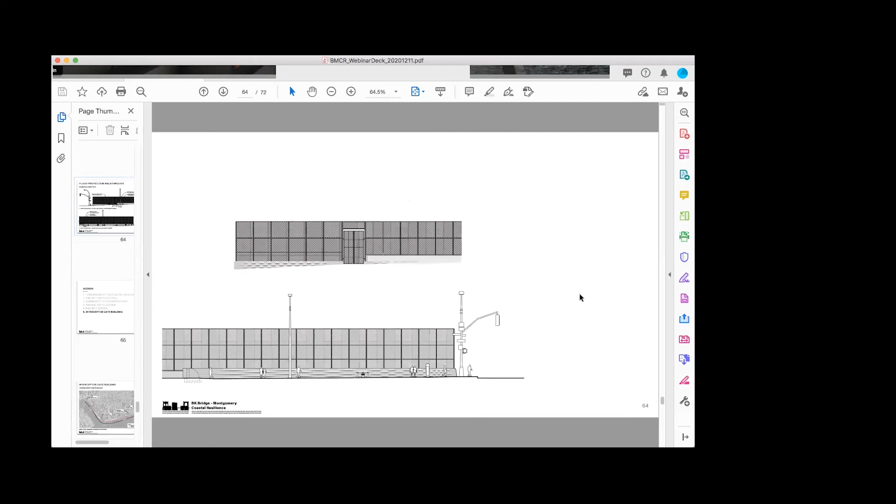Regarding the area up by the Shuang Wen School, on this page you can see where that last tie-in is at Montgomery Street and South Street. The wall is actually quite shallow at that point. Across the street on the side of Pier 36, there will be a larger wall. We don't have too many graphics on that, unfortunately, because it's somewhat standard throughout, but thank you, Tanya, for zooming in there.

We will post this presentation online so you can zoom and manipulate it to see for yourself. Lauren, is there something you wanted to mention on that?

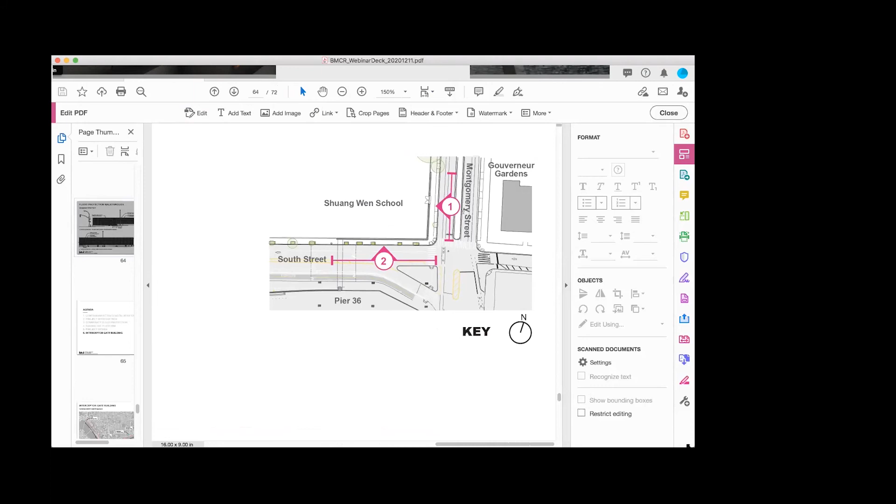Just to clarify, Tanya, could you scroll back to the illustration of the wall to make sure it's clear in this graphic? In an ideal world we'd have illustrative picture views of every square inch of the site, but for this view, the part coming up really high is actually an existing fence around the recreation yard there, not something we're installing as part of this project. There's also an existing wall around the bottom where our flood wall is going. We're building a flood wall just in front of the existing wall, coming up a couple extra feet higher, but for the most part the flood infrastructure condition there is largely in keeping with what already exists on the site.

That's a good point, thanks Lauren. And regarding your first question, Rocky, about planning to be flooded, like we talked about with Pier 35, generally when we design waterfront infrastructure we do need to consider that we don't want to have to replace something immediately after constructing it.

We generally design using a material palette of things that can withstand flooding and can be cleaned off as best as possible. But of course, during a violent storm like Hurricane Sandy, you'd expect things to be damaged somewhat. Regarding Pier 42, the comfort station is actually elevated above the required level because there are different requirements for putting a building in the floodplain versus an open park space. So with open park space, we do our best to design with materials that expect to get wet sometimes. We can't prevent all damage, but we can do our best.

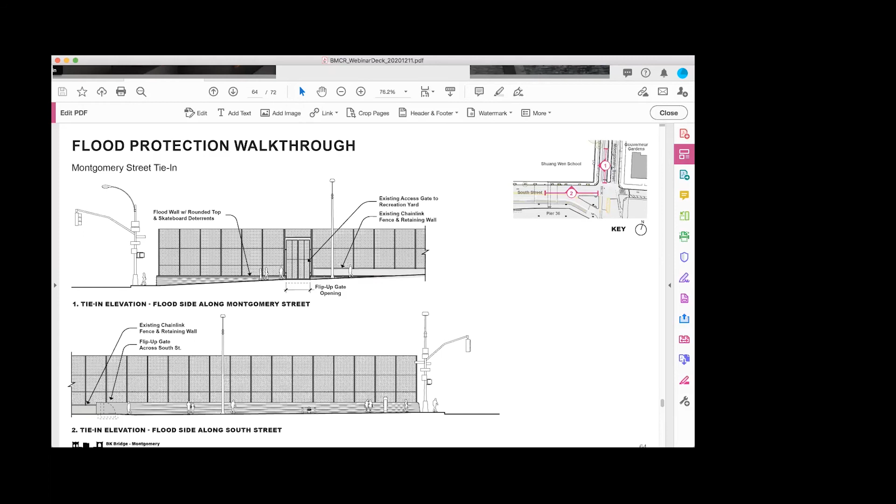So can I add a point? I mentioned before that in determining alignments, we really have to look at constraints. In particular, when thinking about the Pier 36 area and Pier 42, those are piers that sit on pier structures. The technology we're using, these flip-up gates, not only are they very heavy, but they require foundations. Those are basically impossible to situate on top of pier structures. So a number of those facilities have been embarking on building-level improvements, whether it's elevating mechanicals or other appropriate measures. But it was a sharp question and certainly an issue. We have 520 miles of coastline. This issue is not unique to this location.

Great, thank you. So I see in the chat folks are referring back to previous questions that I believe Tanya asked. I did see Tanya had her hand raised, although she may have had to step out. I'd be happy to wait for her to get back if somebody knows if she's able to come back. Otherwise, we can- oh, she's still here. Tanya, I'll ask you to unmute if you'd like. All right, so we can come back to Tanya.

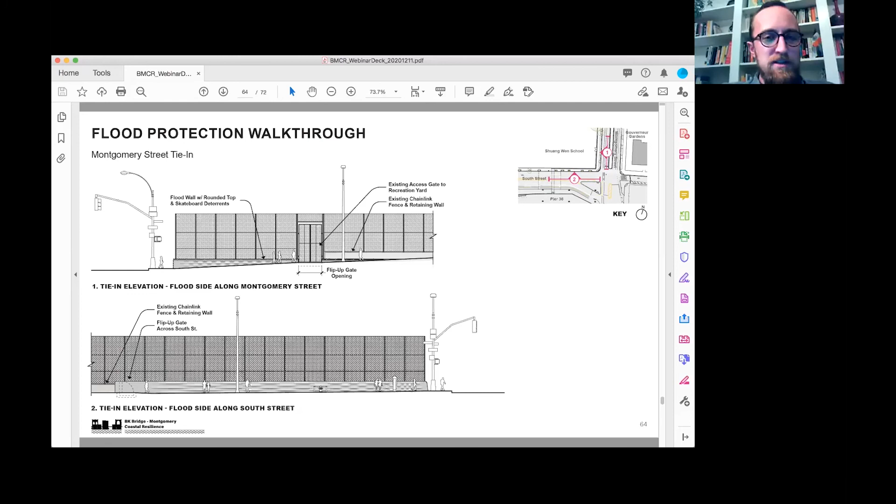Well, hi everyone. Oh, hey, good evening. It's kind of noisy with my 10-month-old in the background. Oh, it's okay, that's why I was texting. I'd be happy to just read them out since you did type them in if you'd prefer that. Can you please, and let me just introduce myself, of course, really quickly before she starts. All right, sorry, thanks everyone for joining us. It's nice to see you.

My name is Tanya Castro, and I have been a resident of 265 Cherry Street since 1979. I am the Lands End 2 Resident Association co-chair of the Board of Directors, and I've served my residents since 2013. My questions that I've presented, the responses have to go back to my residents. Many of them tried to attend this meeting via call-in, but unfortunately they needed translators. So they came to my door and have been knocking since. So please, if you can give more detail to all of my questions, I'd really appreciate that. But yes, if you can reply to my questions, that'd be great. Thank you, everyone, have a good evening.

Tanya, I'm glad you're here. Really quickly to note, unfortunately the Zoom translation interpretation feature is only available through the computer platform. But like I mentioned earlier, we will have the videos uploaded in each of the interpreted languages afterward. So I hope that helps. Thank you, Tanya, for mentioning this.

So I'm going to read out a couple of Tanya's questions, which she put in the chat previously. There was a section regarding the Newtown wastewater treatment plant, which we did cover. The other questions included: is the basketball court moving south? How far? Actually, why don't we start with that one? I can read them individually as we go. So Lauren, would you just remind us why the basketball court had to move from its current location to where we did put it?

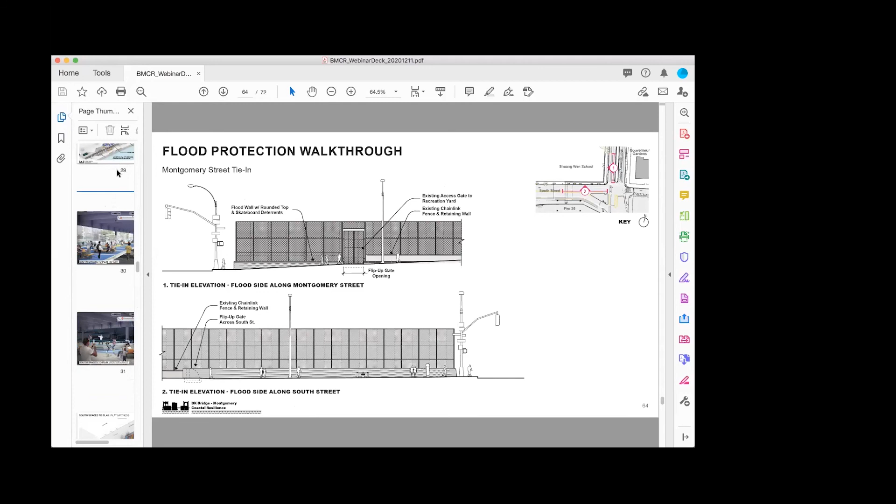So here, where we're putting a new half court in place of the ones we're disrupting, we're moving one near Robert Wagner Place. The reason it's located here and not elsewhere on the site is that in this location, the flood protection system, which you see as the dark gray band running down the middle of the esplanade, is close enough to the water side, and the esplanade is wide enough that we can actually fit a basketball court on the dry side next to the flood protection alignment, not on top of it. So this is pretty much the only location where we can feasibly put a court available for play. That's why we're moving it.

Thank you, Lauren. Yeah, we do understand that's a challenge, and that's disappointing to some folks. It's really about fitting whatever we can, wherever we can.

So a couple other questions from Tanya: in the event there is a mishap during the project, are there additional funds available to resolve damage and ensure the project is completed? I want to loop in a question Heather asked earlier in the chat too, which is, has COVID affected the finances available for this project?

Regarding funding, I won't speak for DDC, who is doing the construction, but the city has very stringent insurance requirements for its contractors, and we maintain sites as safely as we can, and there are contingencies available if any challenging circumstances come up.

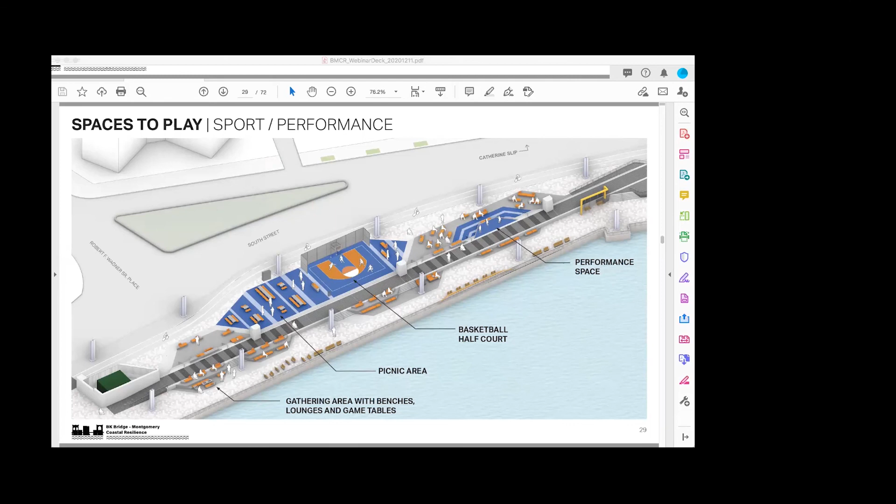Sorry Will, would you mind repeating that question? Yeah, of course. The question was regarding ongoing inspection of the gates, for both making sure that they connect to each other properly, noticing cracks, and noticing other sort of structural wear.

Oh yes, so again, that's something that the details of our operation and maintenance plan, which we're putting together for this project, is part of the updates we'll be sharing at our next public meeting in the spring. And we're working closely with our agency partners at DOT, who will be operating and maintaining these gates, to develop a plan to make sure the gates are always in good working condition before each hurricane season.

Great, thank you Lauren. There is a question from Trevor in the chat. This question says, will this project achieve FEMA accreditation, and will this lower flood insurance rates?

It's a great question. I would probably also turn this to AECOM and to Jordan, but we do intend for this to be a project that complies with those guidelines, yes. Lauren and Jordan, is there any more detail that you'd like to add there in terms of what that process looks like? I would just add that yes, that's certainly the intent.

And in fact, we met with FEMA earlier today, and plan to do so through 100% design and into the future, before construction and beyond, quite frankly, because it's a conversation we need to have with FEMA. I certainly don't want to speculate, but the intent is that once we accredit the system, then after that the maps would change. But once again, it's kind of early in the conversation with FEMA, but we anticipate going that route.